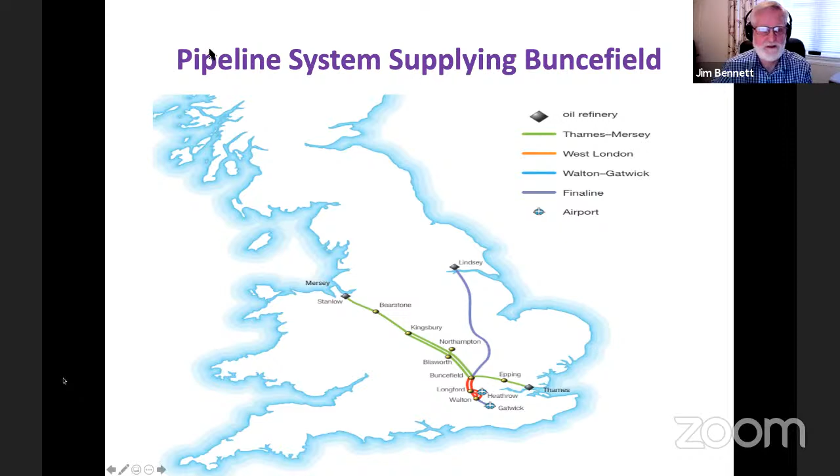So what I'd like to do is link this. Where are we now? Share. Okay, fine. So what I'd like to do is give you a sense of what actually happened. Then I'd like to look at it from a barrier principle perspective, a bow tie.

As we can see here, the parcel of unleaded fuel was coming through, and tank 912 is located round about here in the center. And that would be, as we see here, about 0500 in the morning. And I reckon round about 5:20, 5:37, it started to come over.

The 2 main things we're here to learn about, particularly from a human factors perspective, about the environment, the delta that we were talking about here. What was the difference that made a difference? Failure of the automatic tank gauging system, and the high level switch is what we're looking at here. And this site had the consent to store 94,000 tons of hydrocarbons, and it supplied 8% of the fuel to the UK.

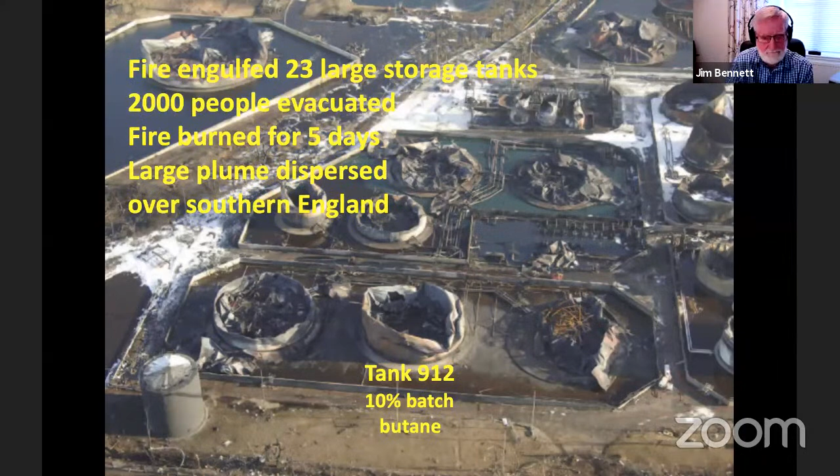What I'd like to do now is move forward and look at it from a bow tie. You may be familiar with the bow tie concepts. My background is working both onshore and offshore, and a key aspect of controlling major accident hazards from a process safety perspective offshore is a bow tie analysis, looking at all the potential top events we've got. And the hazard, as we've got here, is petroleum spirit, basically under pressure, and we look at the threat, the initiating event, and the various barriers or controls that we have.

The escalation factor is the delta factor. What is the potential thing that could happen differently? And what can we put in place if it's foreseeable, particularly from human factors engineering, to give us an early warning that it's actually happening? And across the years, one of the things close to my heart is people, people, people. What do we learn from this? What do we take from this? It's being able to recognize, within ourselves, within our organization, things if they're not quite right.

Who do I speak to? Who is the technical authority? Who's my supervisor? Who's my manager? Who's the person that can help me? Or the person adjacent to me? As a process operator on plants, one of the things I've found, you probably see here I've got the ear muffs on just now, but it's our senses that give us knowledge of what's happening. What is the delta? What's that vibration? What's that smell? What's this potential escalation factor that's happening?

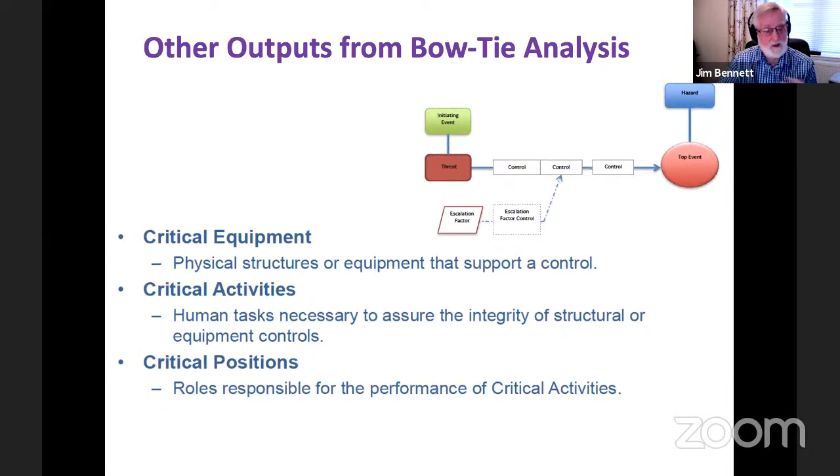What are the activities, the human tasks, to make sure we've got the integrity of all equipment controls, and who does it and when, and to what standard? What's our level of competency? Do we know what our level of competency is? And over the years, I like to think about competency as someone who knows what they don't know. What's the delta? The thing that I don't know. Where can I get more data on it? Or who do I need to speak to?

So the hypothetical bow tie we have here, and then we'll get into what the delta was within the Buncefield. So we've got the flammable fuel, the top event or the hazard, if you like, coming to the top event of a fuel spill, the initiating event of the tank.

And we've got all our various controls, 4, 5, 6, 7: transferring, so that's communications, when we're going to start if we're doing it, monitoring, and we've got our level indicators. Are they working or not? Our fuel level when they're coming, and then we've got our alarm systems.

We started off tonight talking about a car and driving our car.

Have we got any alarms coming? Have we got high level alarms coming? Do we need to do anything about it? And then we go to the high, shut off, shut down, go to place of safety.

Now, on the right-hand side of the bow tie is basically the escalation factors. It's firefighting equipment, passive, active fire systems to reduce what's actually happening within it.

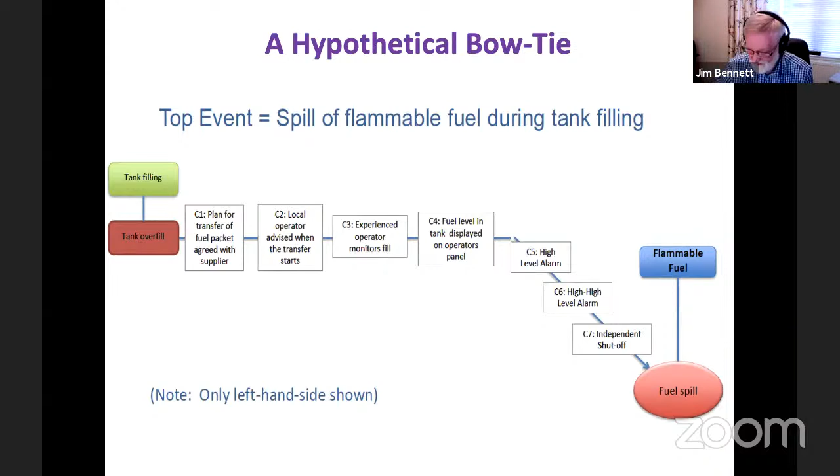So what is intended and what's expected? What are some of the things that we think about? We can do this, as we said before, in many things in life: what's intended, what's expected. So these are the things on the outside here.

What happened? The unexpected change, so we're planning a transfer of fuel. We had an unexpected change of plan. What's the control? Good communications. We've got proactive operator monitoring. The deviation, the delta, doesn't monitor it as well.

So what do we do from a human factors perspective to ensure this? What is the safety critical nature? What's the procedures and practices? What's our signals to say this is a safety critical activity? What's the probability of failure? And what can we do about it to reduce that to as low as reasonably practicable? That's done through job design and monitoring.

Alarms. The delta is it doesn't sense, it doesn't function. What's our mitigation for that, or control? Maintenance and testing. So we do maintenance and testing, as we said before, reliability, functionality, availability.

And our final barrier we have here is the delta: it doesn't shut off, it doesn't function correctly. Regular maintenance and testing, it all leads in, and it's like our SIL, safety integrity levels, all combine up, to give us our overall safety level.

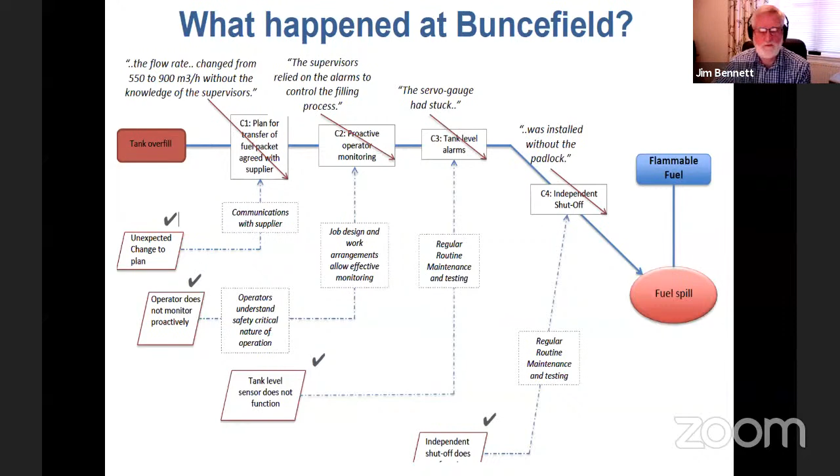So how about the environment, these performance shaping factors that resulted in all this actually happening? Running through all the ones we've got, I'll give you a sense of what some of these are. Competency - someone who knows what they don't know. Competency of all staff involved, including the manufacture and the build of this. Do people have the necessary skills, experience and training, which we mentioned earlier?

Yes, we can have it, but it's having operational training that goes with it. Do we understand the equipment? Do we understand its operating parameters, its safe operating envelope? What's the delta? If it's deviation, what do we need to do about it? Procedures - that's what we're talking about here.

There's something I feel is really on this, and we touched on it last month - we were talking about Texas City. What about the organizational maturity of the organization? Are we a proactive organization? Are we a reactive organization?

In my experience, what I've found is the greater level of competency that we have, we lighten up a bit on how detailed the procedures are. If it's very, very detailed, there's potential that people will miss steps within it. So written procedures that we've got, flow diagrams, system diagrams, process design, testing...

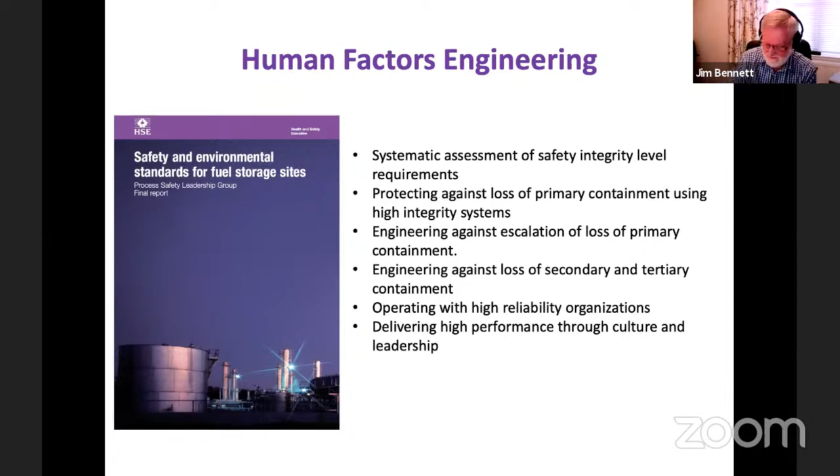So I'm conscious of time, I'll move on. And with this impact of having this plume, if you like, and the environmental impact in it, this impact we had in London - we had a very similar aspect happening with another incident in London. And many of you have heard of this, the Grenfell disaster that happened as well.

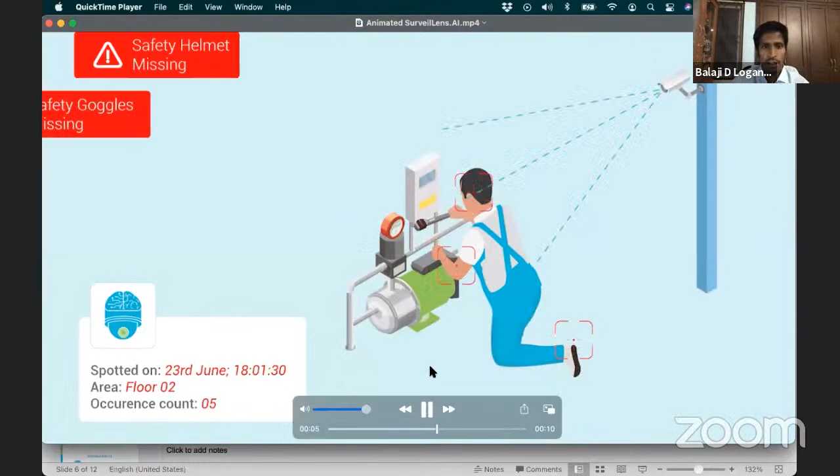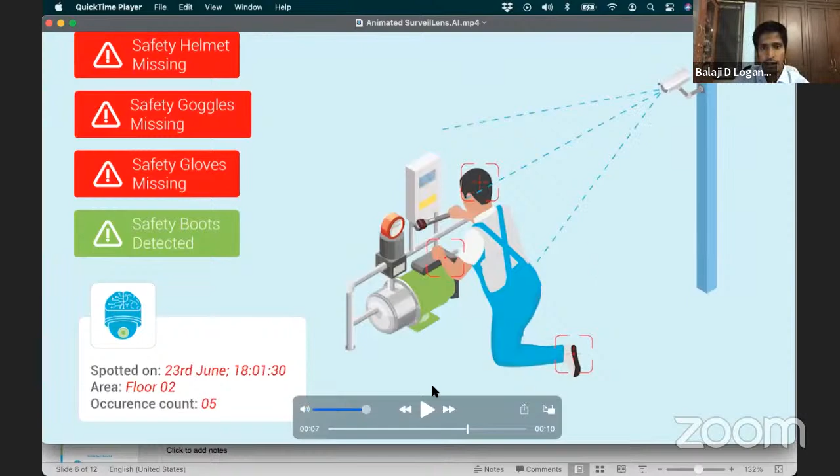Let's look at a second example, where a person is working at a factory doing an important activity. You can see he is not wearing gloves or a helmet, only the boots. A normal CCTV camera captures what's really happening, checking that the safety helmet, goggles, and gloves are missing, while only the safety boots are detected, and records the incident. This is the basic idea of this whole application.

So a moment before we were mentioning what we can do if we provide artificial intelligence to our CCTV system, especially those found in our factories and industries. This is the key thing we are going to show you today.

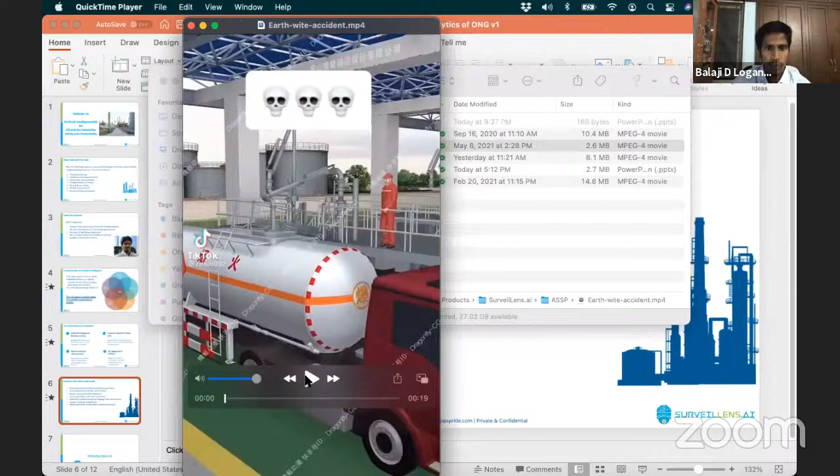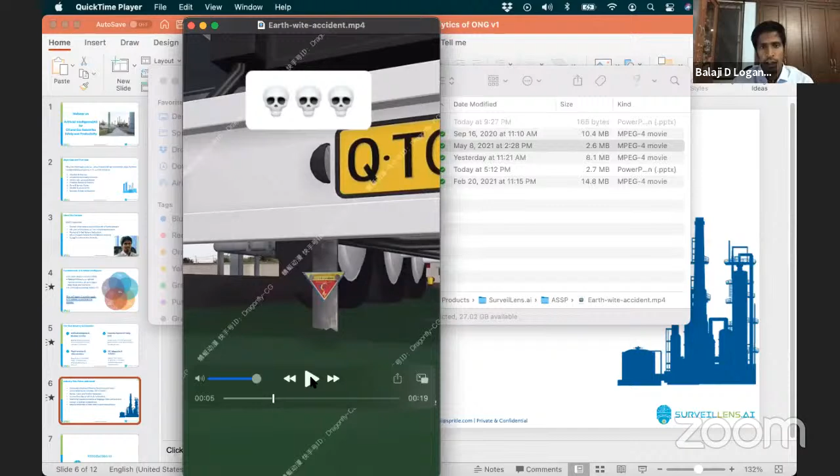I want to show one more quick video. You can see that in this video, the person has failed to connect the earth wiring cable.

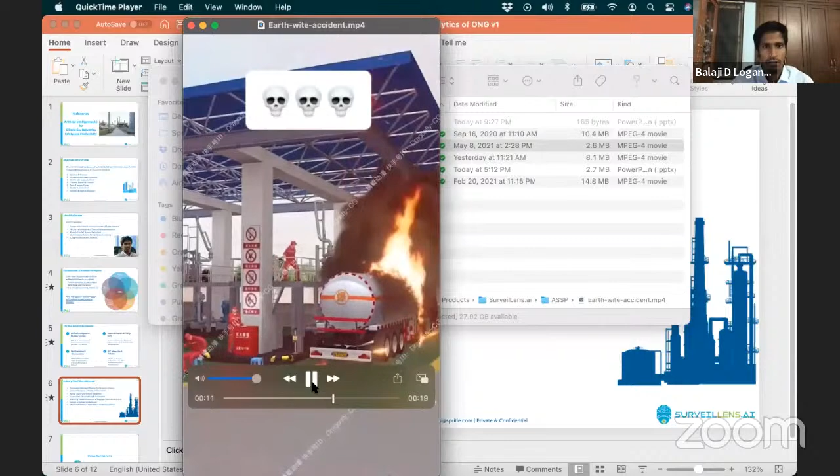Just to quickly replay, the key problem here is this: the earth wiring cable wasn't connected to the truck. That's the key reason illustrated in the video. We will see how we can address this with artificial intelligence applied over CCTV in a typical oil and gas industry. Now let me go back to my presentation.

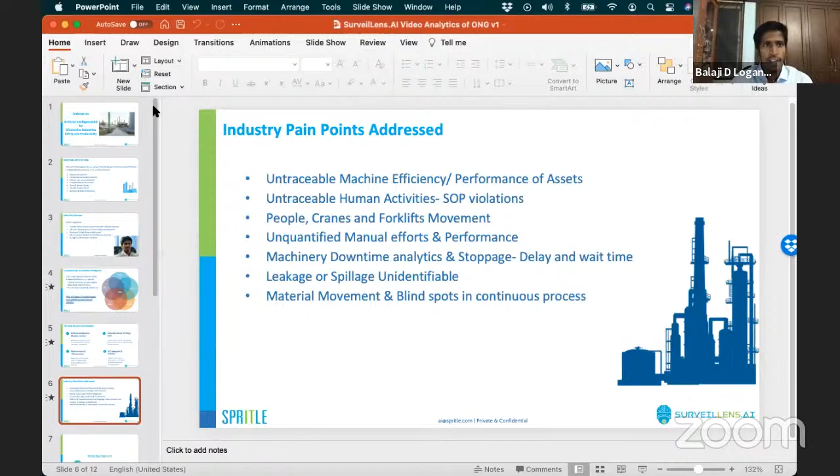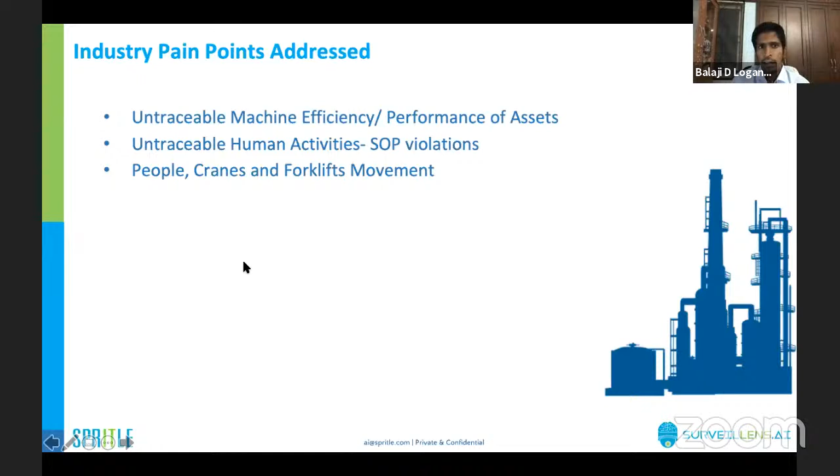The key industry pain points that can be addressed with artificial intelligence are untraceable machine efficiency and untraceable human activities. Despite automation happening, humans are there, and that's how it should be. The goal of AI is not to remove humans, but to complement humans and make sure safety is protected, including addressing how people, crane, and forklift movements cause accidents and how they can be prevented.

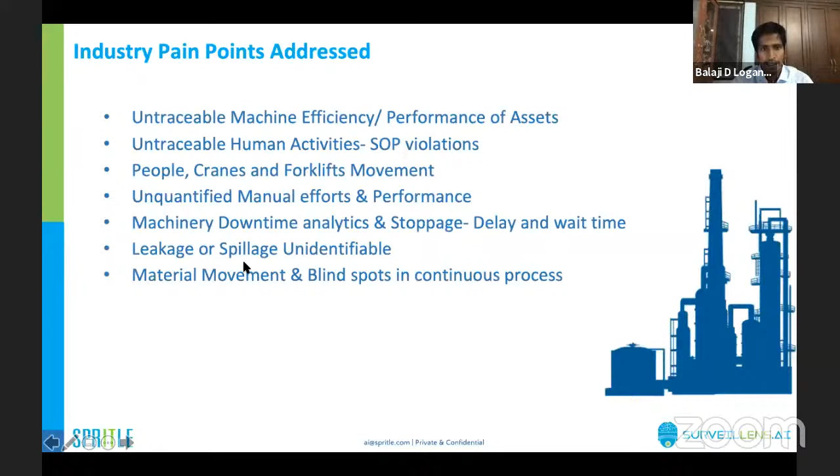Then there's the unquantified manual efforts and performance. We work with both full-time and contract employees, and it's important to measure their performance. Often a machine may go down, and we need to find out why, whether it's a manual stoppage, quality stoppage, or some other problem. Leakage and spillage detection can help identify near-miss accidents, so we can avoid those near-miss accidents, along with monitoring overall material movements.

Now let me introduce our product called SurveilLens.AI. It makes use of the existing CCTV system and provides various analytics that can help us provide safety, productivity, and security.

Now let me go ahead and show you one important video.

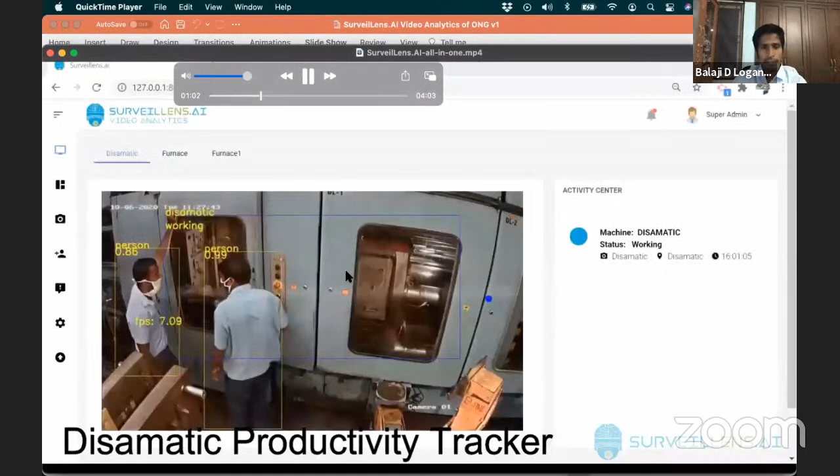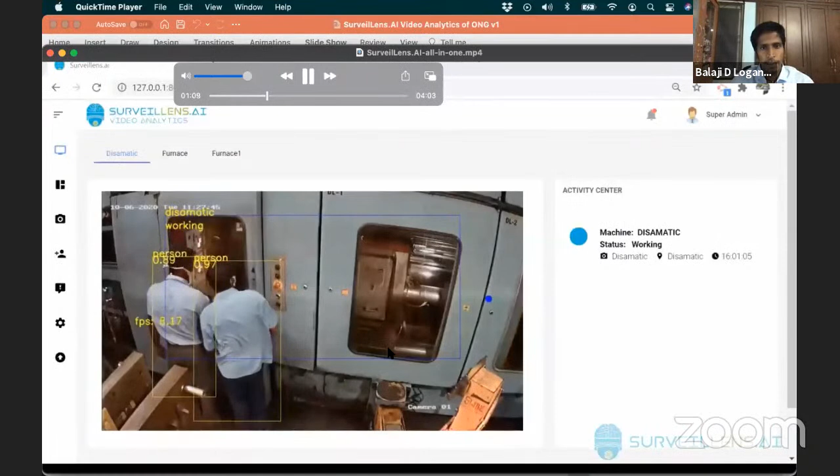This is a foundry in Ranipet, in one part of India, where we check the complete diecasting operation. You can see this is an expensive machine. We are checking why it is being opened, if it is working, how long it is working, and if they are opening it for quality checking or for manual stoppage. So this kind of operation we are checking.

This is another example where we check the productivity of a furnace. You can see this furnace is idle, it's not charged, whereas the furnace here is charged and ready. So we can see whether the furnace is being charged, and if charged, how many people are standing next to it and how they are using it, and so on.

This is also another example in India where we are checking the entire galvanization process. You can see it has several stages, like whether the dip started, dip progress, dipping, and so on. The CCTV video is hardly visible, but still our algorithm and computer vision detecting technology is able to run properly and detect the process here. So this is another example.

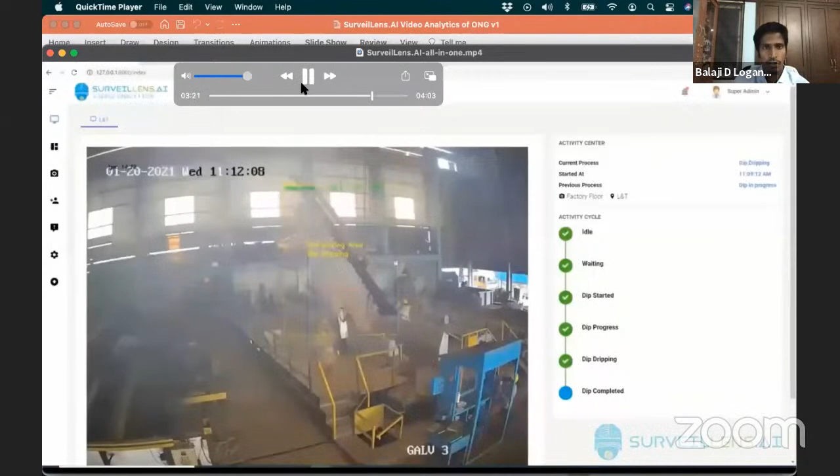Right now we are working with companies like L&T, TVS Sundaram Fasteners India and China, Rane TRW, Samsung. In Samsung Electronics, their entire process is automatic, but still they wanted to have cameras there to provide meaningful data, even to verify the automatic process is working properly or not, and if a human goes inside, why they are going, for what purpose. We may think that a factory that is completely automatic doesn't need maintenance or an audit, but it does. These are all that, and then Romco Siemens and one of the oil and gas companies in India. We have just shown the demo videos and certain success stories.

Just want to quickly walk through the kind of safety things we can measure, like PPE compliance, spillage and leakage detections, material transfer SOP, smoke, fire.

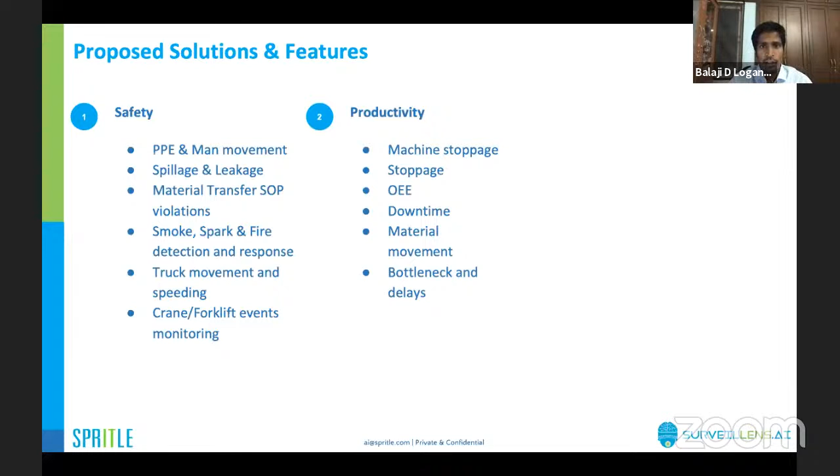Mr. Jim illustrated and shown a lot of useful case studies on how certain SOPs or audits must be performed in order to avoid safety issues, especially fire problems. We have seen the intention and expectations that he illustrated, and we will definitely be able to integrate those procedures into our artificial intelligence system and measure the entire process. We can measure productivity, especially machine stoppage, overall equipment efficiency, downtime, material movement, and so on.

From a security perspective, I'm sure you might have witnessed things like camera-based restrictions and camera-based authorization. We can apply the same in a factory, where we can restrict people based on their face, their ID cards, or their hat. For example, if someone is wearing a blue cap or blue helmet, and you don't want to let them into a certain area, we can raise an alarm saying don't go into this area, and so on.

So those kinds of things are possible.

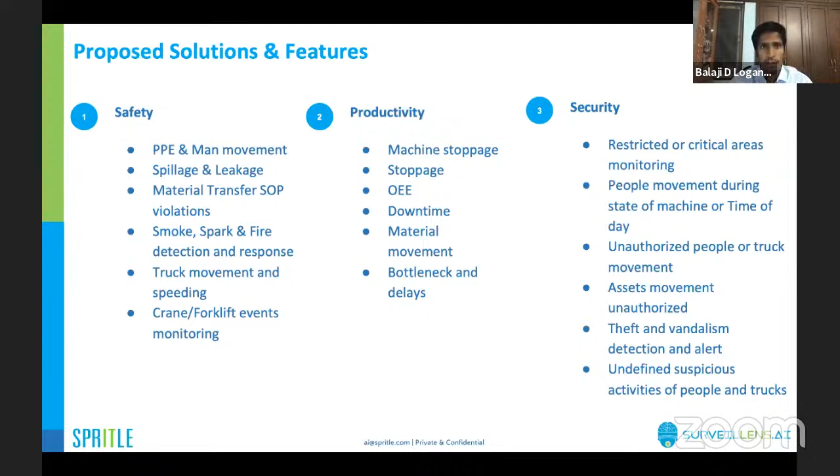So you all might wonder what would be the return of investment when we implement the product SurveilLens.AI. It can increase the production output because it's being monitored 24/7, and it gives you the real-time data, instant data, and visibility of each asset from the OEE angle. And PPE compliance and SOP compliance is really important, because once the safety is compromised, it leads to a lot of loss. So in turn, that is the return of investment when we address it properly.

Safety of people, security, and we can reduce the losses, because we have shown you an example where the furnace is being kept idle and charged. When the furnace is charged, if the people are not next to it, then it's a loss, energy loss. So we will be able to raise an alarm to make people go and make use of the charged furnace within a few minutes and get things going.

And the detection and response system, like Mr. Jim also mentioned, there are certain parameters that need to be detected at the right time so that you can avoid major accidents. You all know why accidents happen. The reason at the end will be one very, very small factor. For example, someone might have missed closing the lid properly or checking the temperature properly and so on. Because he does that again and again, human fatigue may lead to not checking it properly. So we will be able to measure it properly.